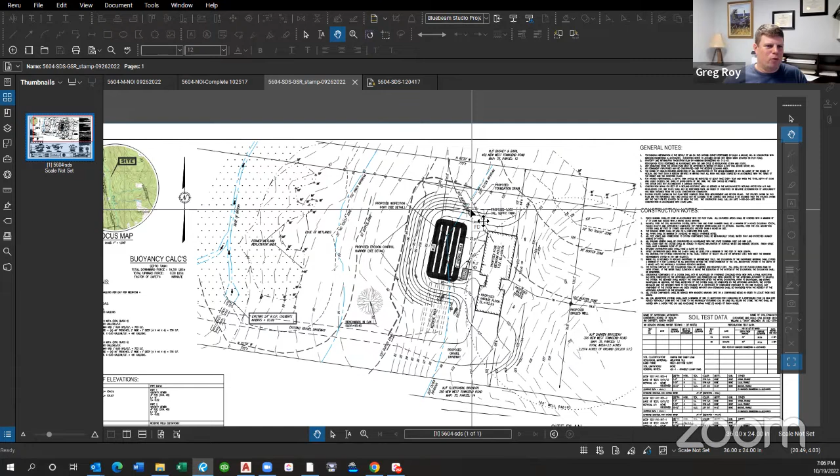So we are here tonight for a new order of conditions, which is really just a resubmittal of an old plan that, granted, not many of your commissioners have seen because you're all new since 2017, but it's a resubmittal of a plan and notice of intent that was previously approved by the commission back in 2017. But be that as it may, I'll give you a brief overview.

New West Townsend Road is off of the page here to the left. I'm sorry. Can you all hear me?

Can you folks hear me? We can hear you, Greg, but it sounds like you're getting feedback from another audio device in your room. Yeah, I don't know what that would be. Is this better? It is better, for me too. Sorry about that, I'm not sure what that was.

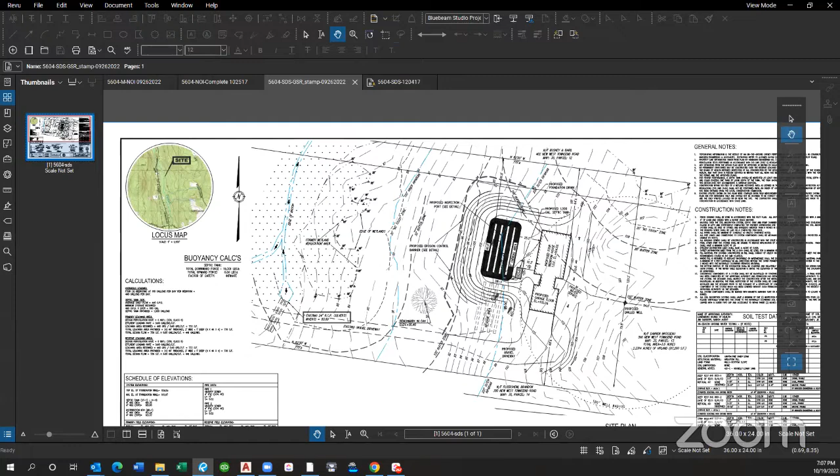New West Townsend Road is over here by where the locus map would be, so it's out of the picture. In 2003, the commission also approved another order of conditions to construct the gravel driveway from New West Townsend Road into the project site area. That's almost 20 years old now. I actually lived across the street from this for a number of years, so I remember when that went in about 20 years ago. But there's an existing gravel driveway that comes into the property from New West Townsend Road.

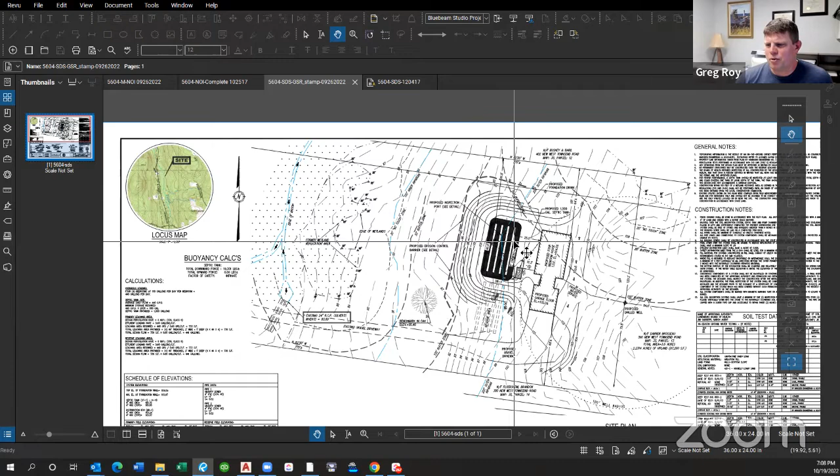The soil testing for the site was conducted in the area you can see here, the hatched rectangular area on the screen, with the four white rectangles being the leaching trenches. The riverfront area is very difficult to see, but it's in light blue—that's the outer limit of the 200-foot riverfront area. This lighter dashed line is the limit of the 100-foot buffer zone to the wetlands, and this darker hatch line is the limit of our erosion control barrier.

So you can see that we're not working very much within the buffer zone, and we are working a little bit within the outer riparian zone of the riverfront area, but no work is proposed within the 100-foot riparian zone.

What I wanted to point out to the commission this evening is that relative to the proposed site disturbance within both the buffer zone and the riverfront area, there is no change to this plan from what was previously approved. The erosion control barrier remains unchanged, the location remains unchanged. The Board of Health, after observing the bottom of excavation, did ask us to raise the system by a foot. So the septic system was raised in elevation by one foot, which affected the breakout grading slightly, but we did not have to tweak the limit of clearing. We were able to keep all the grading within the previously approved work area, upgradient of the erosion control barrier.

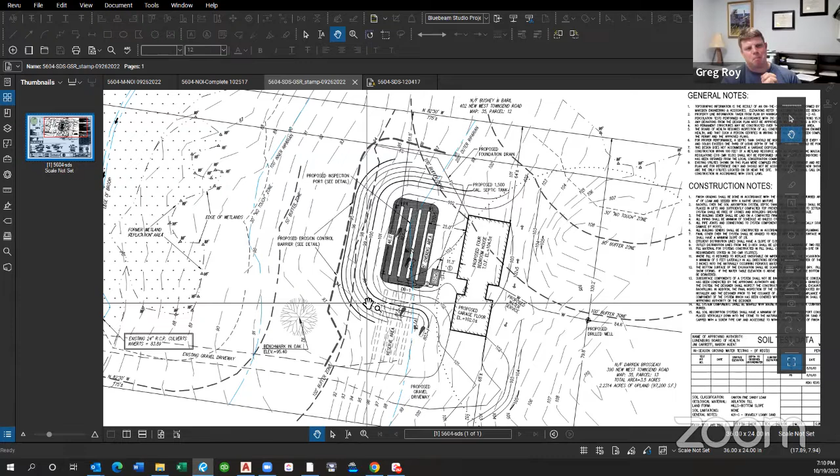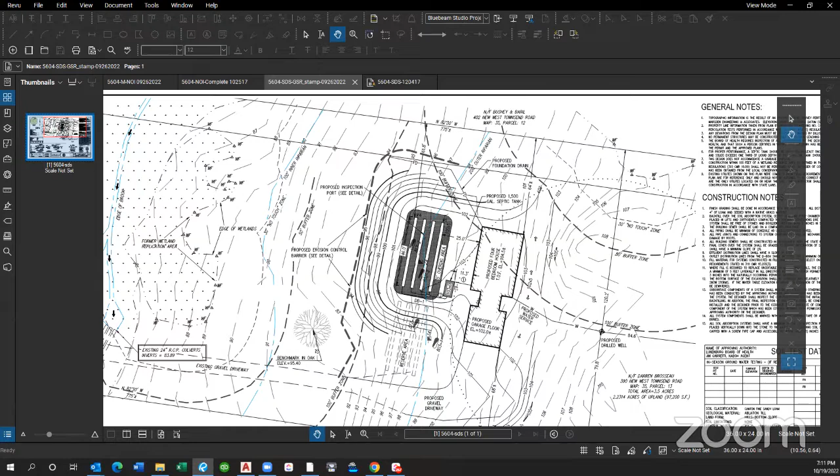Do you have the existing, or I guess the previous order of conditions, handy to show the commission? Let me check here. We have them in the office as well. Could you try to make them available to show us, Nadia? I can pull them up in a minute or two. I don't care who shows them, I just wanted to make certain that we had them. Let me stop my share and then I can try to find the order as well. Thank you.

I was able to go with several of my fellow commissioners on the site walk this past weekend. One thing I noticed about the wattles is that they appear to be doing their job, but are also starting to compost and decay into the surrounding area. So at the very least, I'd be interested in seeing those wattles renewed—new ones placed on top or something to that effect. Okay, yep, it's been a few years for sure, so I can fully understand that.

Rich, you have your hand up.

I don't see a DEP number for this project unless Greg had been notified today. Yeah, we did get notified today, Rich, that one was issued. We tried to file this earlier than the filing deadline to give DEP a little more time to issue it, because the client is midstream and was hoping to keep moving. So they were able to issue us a DEP number. It's number 1274.

I also got the email here in the office. Very good. While we're looking for that document, do any of the other commissioners have questions or comments?

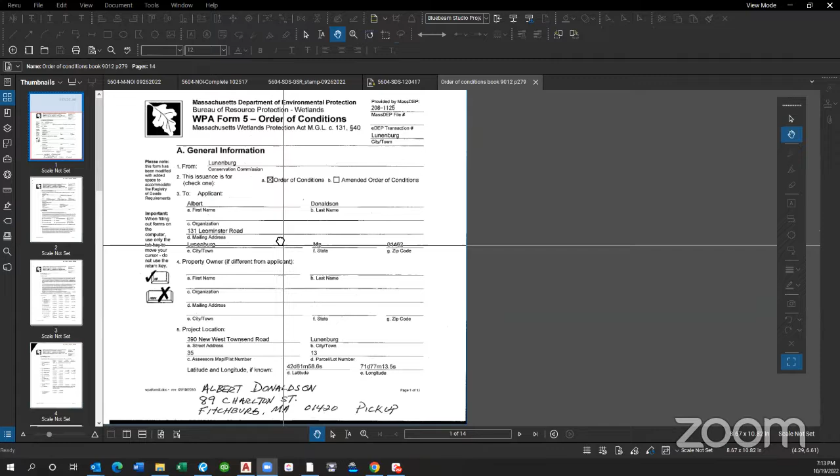I did find the order of conditions as well. I'll put that up on the screen. This was the order here. You can see it was recorded, and it was 1125. It was at the time issued to Albert Donaldson. The property has changed hands now, so your applicant this evening is Brosseau, but it's the same piece of property.

You can just zip to the last page, Greg. Yeah, that's what I was thinking as well. Additional comments on it. Let's see. These are general conditions. Yep, we would have added any special conditions right at the very end, if there were any, Matt would have put them at the end. These are probably them, right Rich? Just the last page, page 14. Okay, yep, there's one.

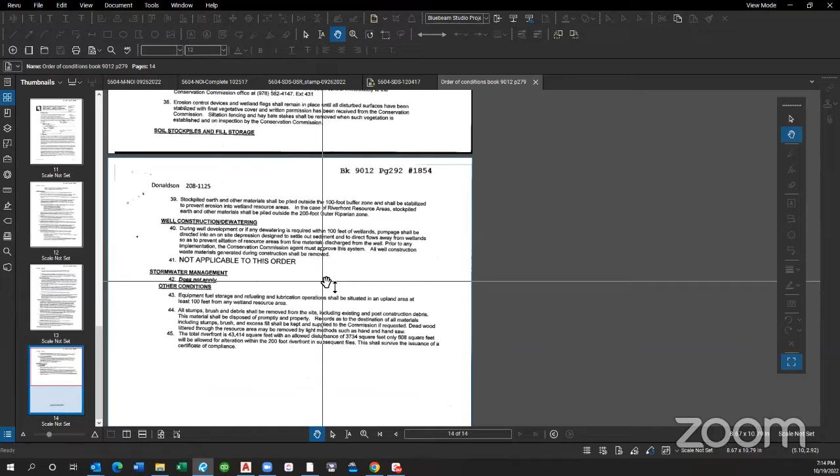Can you all see that? I'm trying to zoom in here. Yes, that's a good size for me. Let me see if I can zoom in a little here. So it looks like the biggest thing we added was the total riverfront disturbance, so that it was recorded. And you said that hasn't changed at all, Greg?

Well, it hasn't changed at all, Rich, but we have no idea. That was a comment by DEP pointing to condition 45 that listed 808 square feet. I have absolutely no idea where that number came from. The number is closer to 8,000 square feet when we calculate it. So I have no idea where that number came from, to be quite honest with you.

So the total riverfront is not 43 — the total riverfront of the property, as reported on the forms you have now, our current Form 3 submitted with this application, is 91,000 square feet. That's total riverfront on the property, and the proposed disturbance is 8,200 square feet. I'm rounding, but we give you it down to the square foot. I don't know if it was off by a decimal place, a scrivener's error there or what, but we haven't changed anything on the erosion control line from this order, the plan that was referenced by this order. It just doesn't come anywhere near 808 square feet.

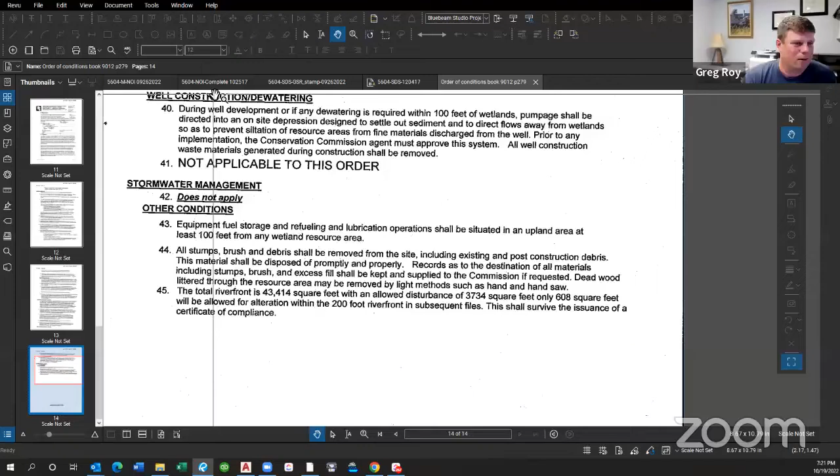I can only guess that it was given as part of the public hearing process, or maybe supplementally given. But what we did this time, Rich, and members of the commission, was calculate the entire riverfront on the property, which is really the right way to do this, and that's 91,000 and change.

And then we also calculated the work proposed within the riverfront area, which is nominally 8,200 square feet. So I think those numbers you could certainly reference—they're in the Form 3 that you have this evening, so you could certainly reference those in the order if you wish.

Does that make sense? Yep, no, I just want to stay with where we've already approved it once, just to have the proper numbers in there. Yeah, you could definitely just update those numbers with the ones we have in the Form 3, and that would work.

So what was left for alteration, so is it the 10% threshold? Say that again. So with 91,000 square foot riverfront, 8,284 square feet of disturbance in the outer riparian.

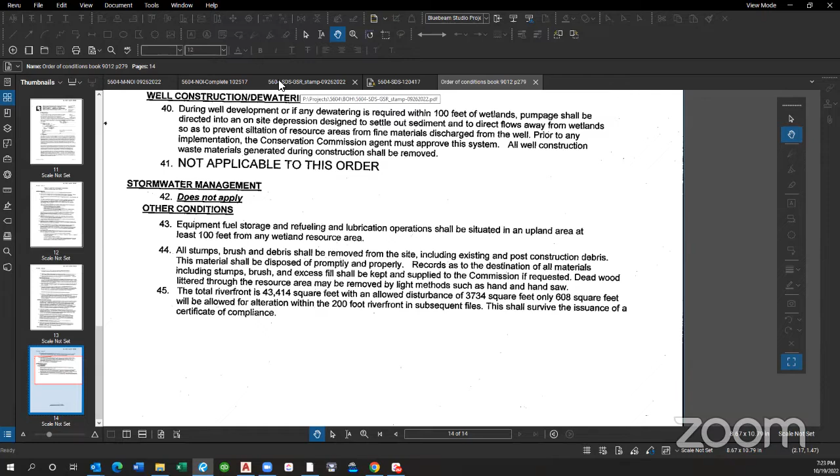Nominally like 900 square feet. If Nadia can just figure that out quick and update the numbers, if you don't mind. Do you want me to put it in the chat? That would be helpful, using the old order of conditions with the correct numbers and the same boilerplate language with the special conditions.

It looks like about 860 square feet of disturbance left. That sounds about right, 10%, okay. Other than that, I remember when it came forward a few years ago, the driveway had definitely been there for quite a while, and it didn't look like it was impounding the brook at all at that time.

So, thank you, Greg. You bet. Do we have any other questions from commissioners?

I think at this time I would be looking for a motion to approve the notice of intent with the pre-existing conditions, the amendments as stated for item 45, and new wattles, something to that effect.

We're happy to, if you want to put it in condition 46 that says the erosion control barriers should be updated or refreshed, that's perfectly acceptable.

I would make a motion that we approve this notice of intent, updating condition 45 from the previous order of conditions to show the proper square footage of riverfront, the square footage of disturbance, and the square footage left as shown on Form 3 that was submitted.

I believe in our order of conditions it is incumbent on the applicant to notify the office 14 days prior to the start of construction for review of the wattles and other areas around the wetlands before they start construction. So at that time you can put in the new wattles prior to the inspection. Thank you.

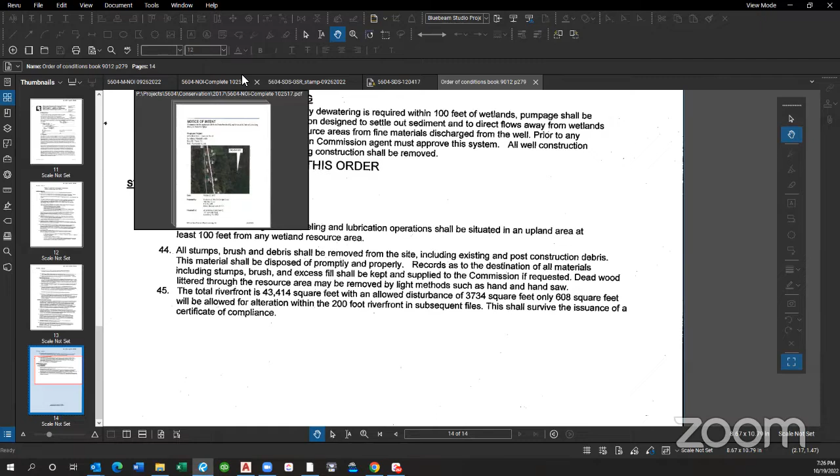Thanks, Greg. Moving on down the agenda, pursuant to Mass General Law Chapter 131 Section 40 as amended, and the Town of Lunenburg Wetlands Protection and Municipal Bylaws, a public meeting on the request of a determination of applicability by the Lunenburg Water District for the replacement of a water main on 1205 through 1479 Mass Ave. Do we have somebody from the Water District here this evening?

My name is Anthony Cleaves. I'm with Haley Ward here on behalf of the Lunenburg Water District. We prepared the RDA application, and also with us tonight, Gary McCarthy and Elise Dubois from Stantec, who did the water main design. It's their plans that were submitted.

To recap from last meeting, we were before the commission to discuss a waiver request regarding the notification of abutters that the local bylaw requires for an RDA. At that last meeting, it was decided not to grant that waiver, but we discussed what abutters would be appropriate to notify. So we did that, generated a list, and notified abutters, and now we can continue on for the discussion of the project.

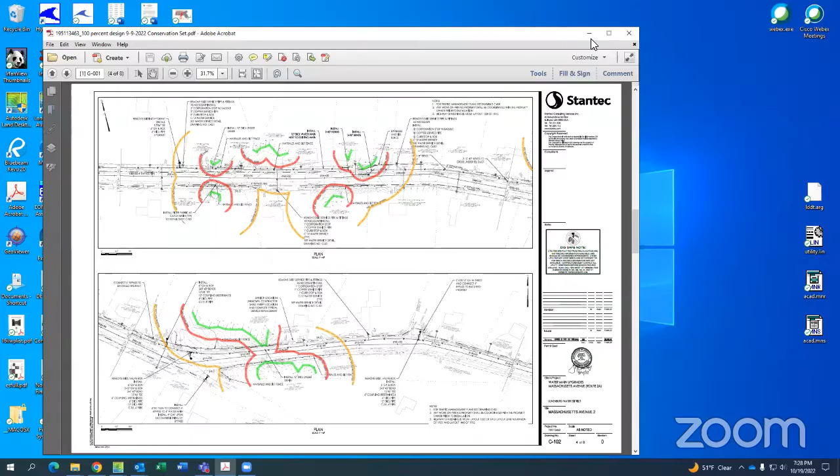Let me start with the Lunenburg Assessors GIS website. The project runs from the Northfield Road intersection of Mass Ave, on the left, a few hundred feet past Connell Drive, on your right. The intent of the project is to install a new replacement water main to replace the one currently in Mass Ave. The work all falls within the right of way of Mass Ave, so it's within the public layout. Much of the work falls in the pavement, and some goes outside into the shoulder areas. As you can see in the GIS, there are a few wetland areas, which is why we're filing.

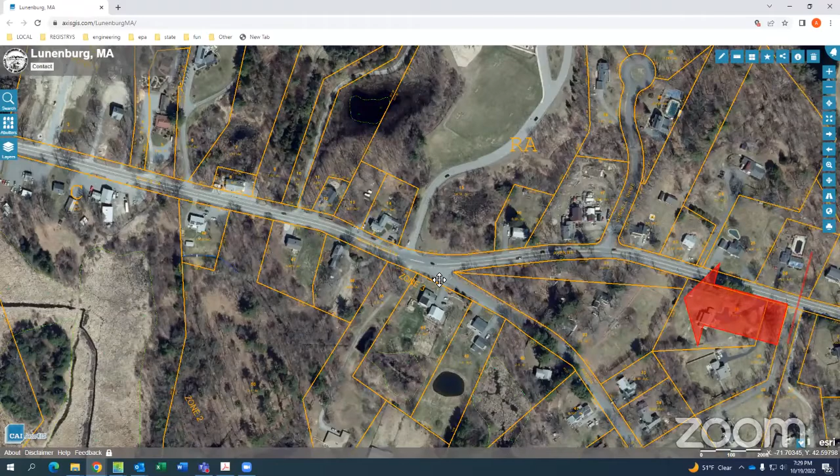There's one wetland area just off of Townsend Harbor Road, then another crossing a little bit past that, which isn't really shown on the GIS - we'll get to that on the plans. Another one is kind of in the middle of the way, and then as you get over near the school driveway, there's another wetland there. So let's come to the plans.

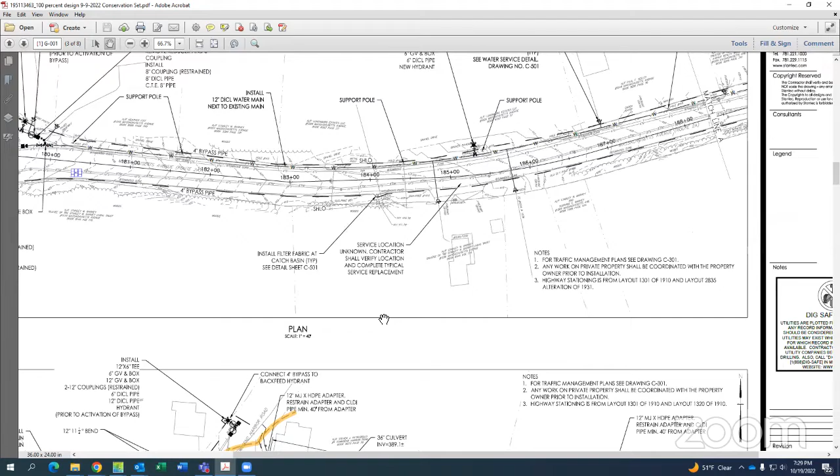So we'll just take you along. Starting on the left-hand side, this is the Northfield Road intersection, and we continue on. At first, for a few hundred feet, there's no buffer zone work. But then as you get to Townsend Harbor Road, what we've highlighted in green is the wetlands, in red the 30-foot no touch, and in yellow-orange the 100-foot buffer zone.

Just zoom in. So the existing water main is on this side of the road, which is where we're putting the new water main. The construction in this section is proposed to be horizontal directionally drilled. This section of the project is the closest to the wetlands, although the existing water main is that close already.

To minimize potential for any temporary disturbance of the wetlands, the proposal is to do a horizontal directional drill where the work pits would be outside of the 30-foot no-touch zone. So this area would remain undisturbed. But we have silt fence and straw wattles proposed along the areas of work in this section to protect the wetlands on both sides of the road as well.

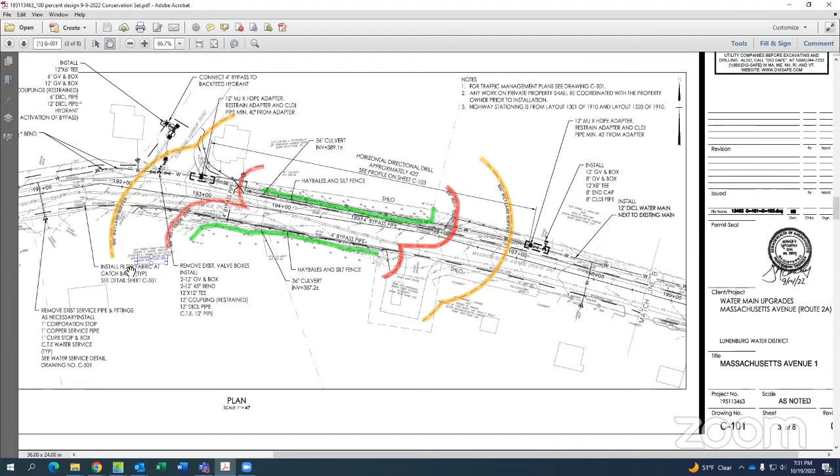And then as we continue, any catch basins that could receive stormwater flow are going to have filter fabric in them to protect against any siltation getting into the catch basins.

Then as we continue on to the next section, this is where we have a few pockets of wetlands on either side of Mass Ave. In this area, we're not as close to the wetlands—the right-of-way doesn't get as close. So this would just be a conventional open cut excavation, typical for utility work.

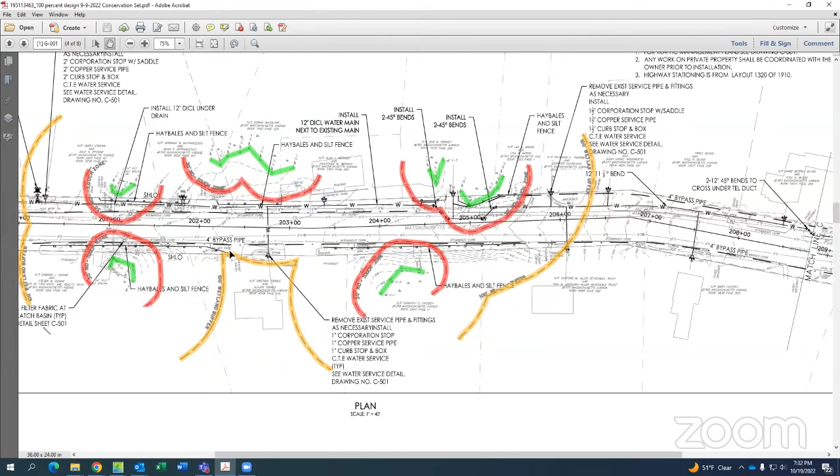Excavate the material, put it to the side, put your pipe in, then backfill and cover it up as you're moving along. Same thing—straw wattle and silt fence along the edges of the work area on both sides of the road. Again, there's the buffer zone, 30-foot no touch, wetlands, and we continue up to Connell Drive and the school driveway. Another wetland area here, identical to the other sections, where the water main is off the edge, with straw wattle and silt fence on both sides to protect the wetlands.

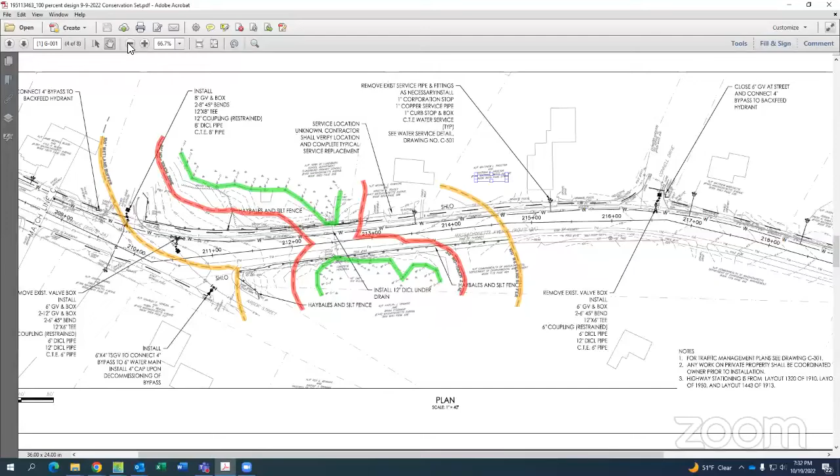And that's a brief overview, if you have any questions.

I do not have any questions. Do any of my fellow commissioners have questions? Rich Tremblay.

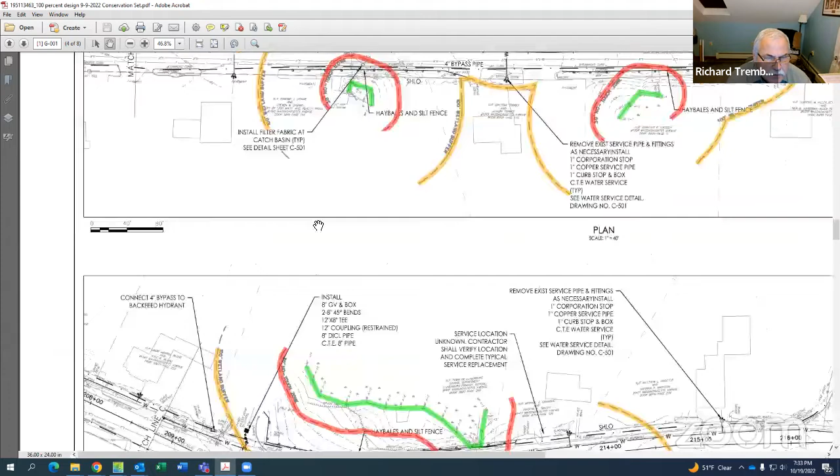Thank you. On the last section that we just talked about, are you going to open the road in that area or do directional digging? This section is open cut within the edge of the pavement, so this would be an open cut. Okay, thank you.

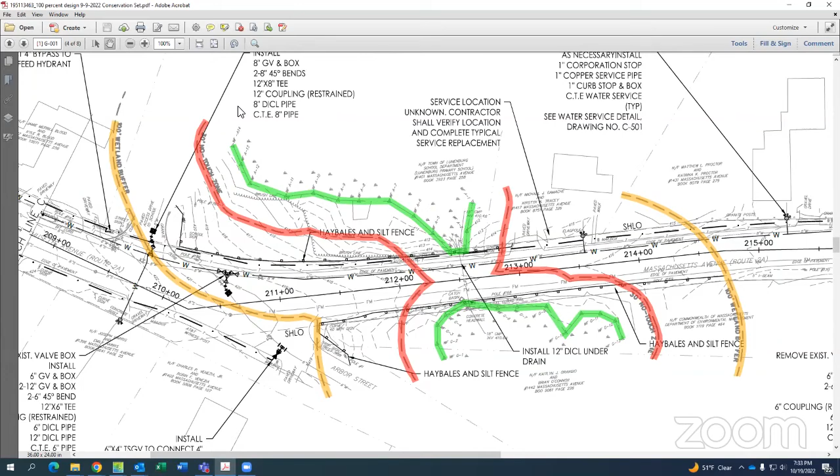Rich Birch. There we go. Oh, there you go. Okay, thank you. Anthony, what's the time frame for construction?

I'm not exactly sure. I'm going to defer to if any of the Stantec folks that are on the line might know what the plan is on that. Gary, do you know when we're going to bid? Sorry, I was just getting unmuted. This is Gary McCarthy from Stantec.

The plan is to go to bid this winter and get a contractor signed up. We're hopeful that this work can be done this coming summer, 2023. The whole industry is experiencing some supply interruptions on getting pipes, so we may be delayed a little bit, but the goal right now is to get this done during the construction season of 2023.

All right, what's the duration of the project, do you estimate? It's probably 60 to 90 days. Would you agree with that, Mike? Yeah, I think so, barring any delays in getting material—mostly pretty straightforward construction. Yeah, I agree. 60 to 90 days. All right.

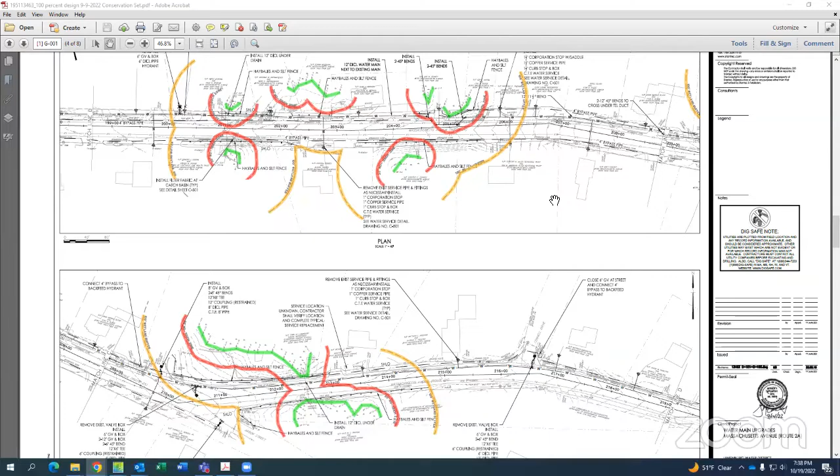Do we have a second? Second, I'll second that. Okay, so I have Rich Birch for the first motion and Katie Childs for the second.

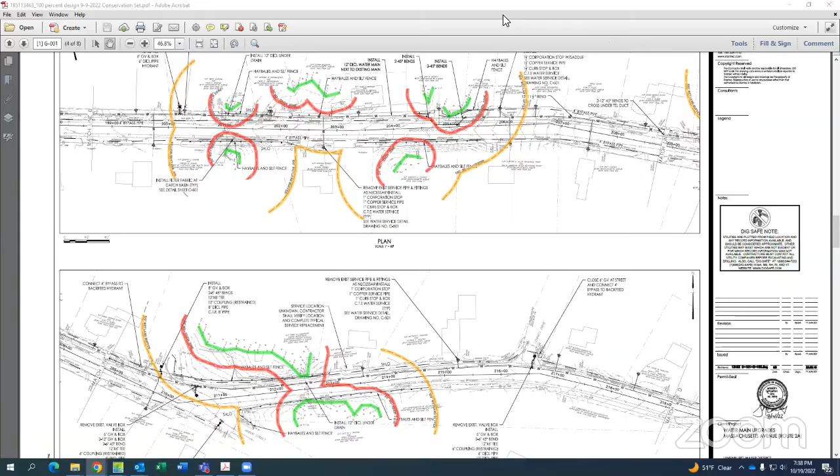Very good, thank you. Thank you very much for your time. Appreciate it. Thank you, folks. We have to vote on it still. Yep, oh, we do, all right. I was getting too eager. We do have to vote on it.

Thank you, Rich. So roll call vote: Rich Birch, aye. Katie Childs, aye. Mike LaRouche. Did we lose him? Rich Tremblay, aye. Aye for myself. And it looks like we lost Mike. Okay, but that's a quorum, so it's approved.

Great, well, thanks again. Thanks again, folks. Thank you. Thanks for your time.

Okay, now let's move on to other parts of our agenda. Mary, you might want to go back and get the minutes approved from the last meeting. Oh, thank you, Nadia, that is correct. The other thing that I failed to do is I had a note here to ask for abutter input, and had not done that.

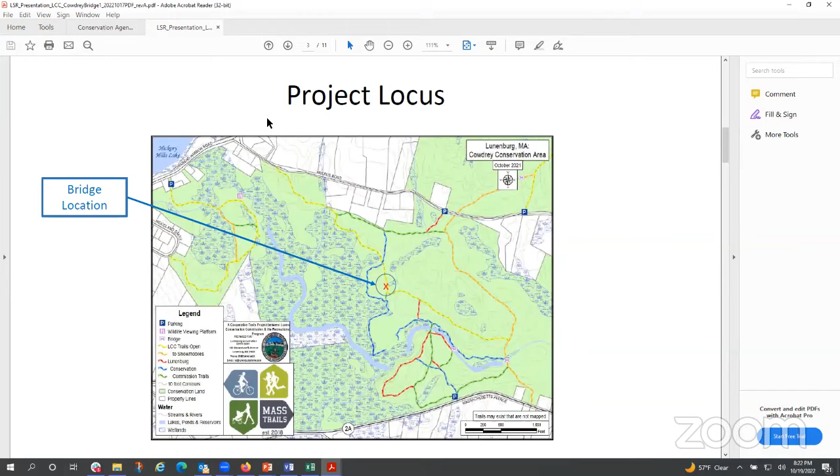Very good. So here's the approximate location of the bridge. As you can see, it's part of one of the main trails that goes through the Cowdrey lot, so it gets a bit of foot traffic. What we'd like to do is get budget support, and I think it'll be less than $1,200. I'll go through the details of why.

I would like to make certain the conservation commissioners are aware we would be using power units, a Kubota and an ATV or similar, to haul materials out, because there's a lot of wood that needs to get down the trail for repairing this bridge.

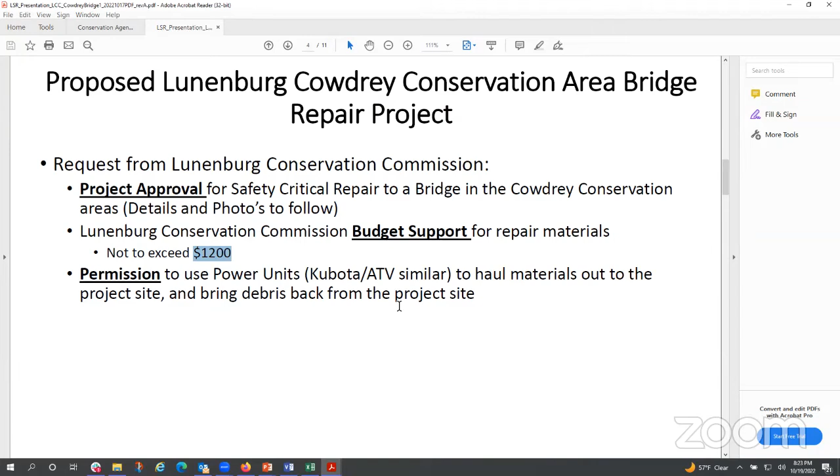What the Lunenburg Snow Riders would provide is the volunteer resources, and we have a lot of professionals in our group. We would remove and dispose of any rotting deck members and install new decking and banding material, using our own tools—chainsaws, battery operated drills, etc.—as necessary to get the old deck removed and new deck installed. Our goal is to do that within a day, so we don't leave a half-done job out there as a further safety hazard.

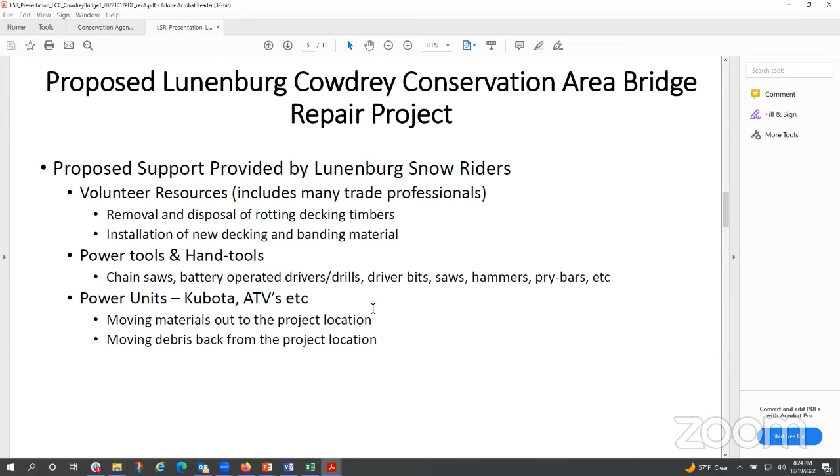And the power units, owned either by the club or by individuals, would be leveraged for moving the material out there and expediting the project.

For the details of the project, we are proposing to widen and reinforce the deck. Right now it's 6 foot by 30 foot; we'd like to actually replace it with 8 foot pressure treated lumber. Widening the bridge allows for safer access for our winter groomers and any other power equipment that needs to get down there for maintenance. It would also reduce the cost of repairs and make it quicker for us to get in and get it done, since we're not cutting each stick of material. 6 foot PT is a little hard to come by now, while 8 foot is widely available—to the extent any PT lumber is widely available these days with the supply chain shortages. It also reduces construction waste.

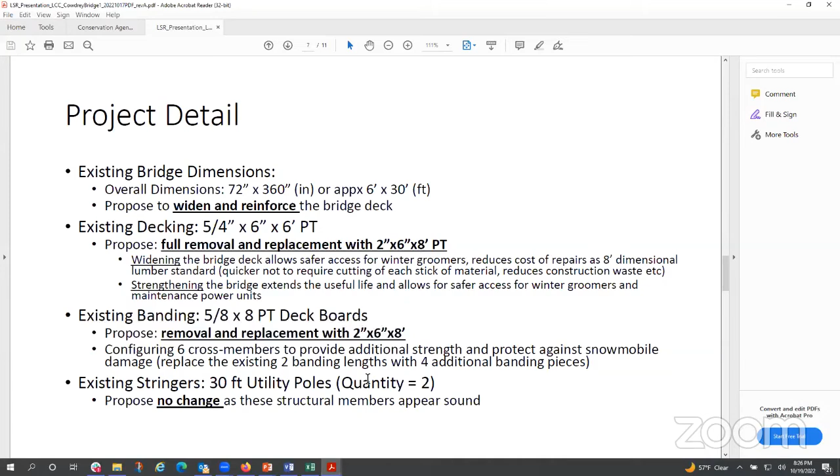We're really expecting to come in well below 1,200, but I never like to go in and ask low and have to come back and ask high again. Actually, I found that Mackey's prices are very competitive. Oh excellent, so we may even be below this number then. That'd be great.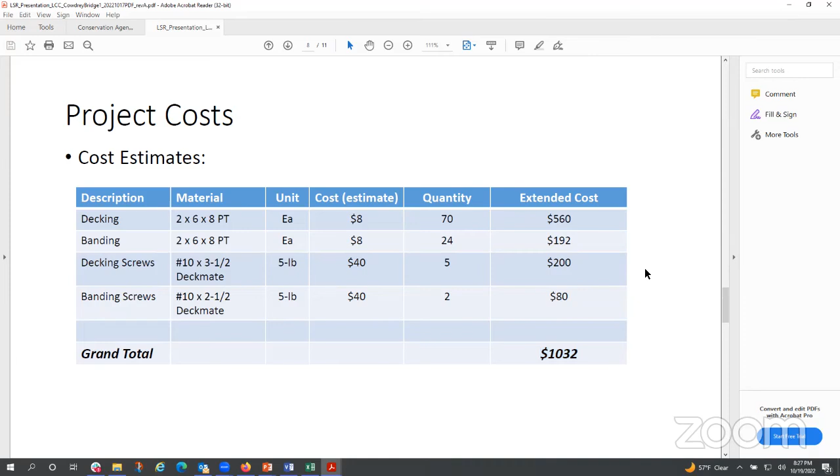Okay, if there are no other questions - oh, Rich. Just a quick question - going from 6-foot decking to 8-foot decking and putting groomers and snowmobiles on it, are just the 2 stringers in their current position going to provide enough strength and stability to the outer edge where you're adding that extra foot on each side? No, I don't think so.

That's one of the reasons we wanted to - well, I think the stringers are okay, but we definitely want to put banding. We're going to do 2x6 banding along the outside to give a little extra strength on the outside. The way I planned the project was to have a half-inch gap between each of the members, so we'll have a little tighter placement on this as well.

So I think between beefing up to the 1.5-inch actual dimension for the 2x6s, and adding more banding across it, we think that'll be pretty robust. But it's a good question - it's something we thought about. Okay, thank you.

Any other questions? No more questions.

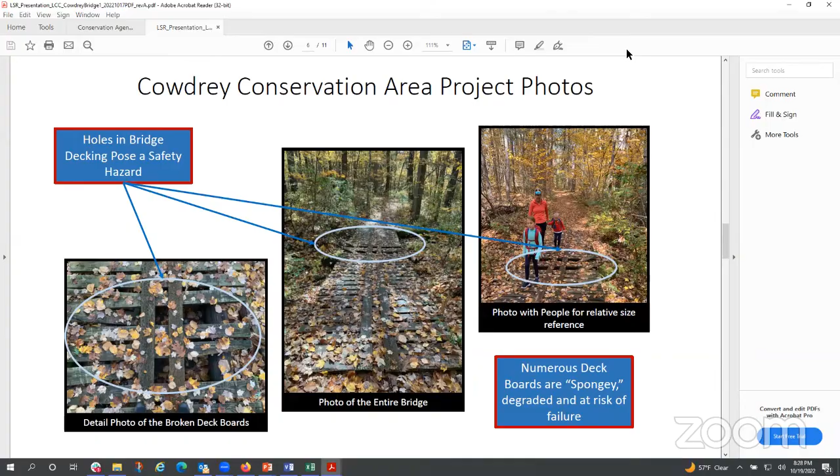Bob, do you think we need to vote as a commission to approve that project, since it's a maintenance and repair project, and we have approved funds on a technical basis? I don't think we need a vote to approve a maintenance process, but I would like to make a motion that we approve this project.

This project and express our appreciation to the snow riders for their labor. And that was a motion. Second. Thank you. Then we'll take a roll call vote.

Bob Pease, aye. Rich Birsch - oh, Rich didn't come off mute, we'll come back to Rich. Katie, aye. Mike LaRouche, aye. Rich Tremblay, aye. Rich Bursch, do you care to vote? Okay, I think he's abstaining, and I for myself.

So thank you folks, I do appreciate that show of support for snow riders and the maintenance and enhancements that they and we, as a snow rider member, I do appreciate the show of support. So thank you.